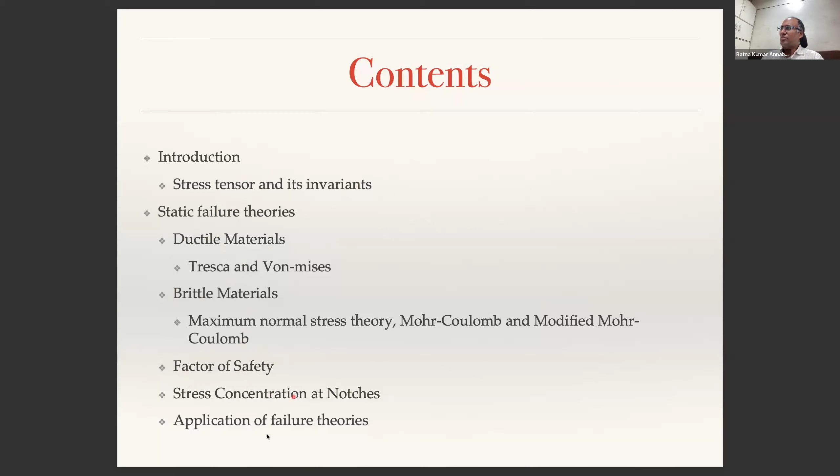In this, we will discuss certain aspects of the concept of a stress tensor and its invariants, and how we will then define the failure theories, different types of failure theories for ductile materials and brittle materials, and then we will define the quantity called factor of safety, and then apply these things to components that have stress concentrations or notches. And then we'll see some application of these failure theories for design problems.

So what is failure? When we say failure, what is the meaning of failure? Does it really mean the complete failure or ultimate fracture of a component, or is it not? And the second thing is, how does one define failure when dealing with a ductile material versus a brittle material? Is the definition of failure the same in both cases? And if you are an engineer, for engineering applications, what do we consider as failure?

The definition of failure itself is important, because depending on the definition of failure, we will be able to characterize or classify whether a particular component or system is safe to use or not. And then, are material properties important? The material properties we have discussed in previous classes, are they important in order to assess failure of a component? These are the questions one needs to ask before we move on to understanding failure.

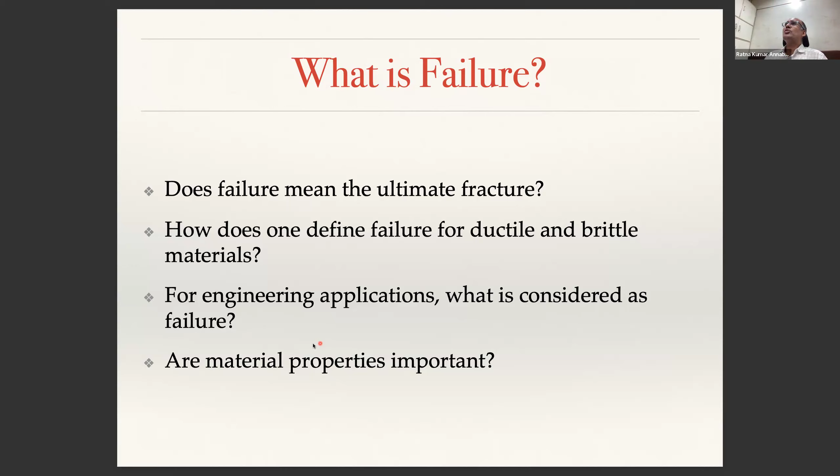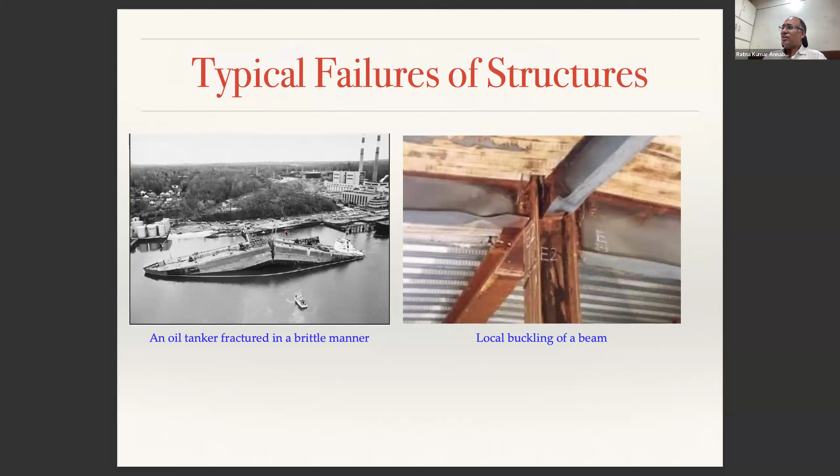So now the question is, why do parts fail like this? Why do structures fail like that? Why did this one only buckle but not fail, whereas this other one completely broke instead of giving a sign like the one on the right-hand side? So the question we ask is, why do parts or components fail? I think this is the single most important question that contributes to a rich scientific understanding of failure of materials. If we don't ask this question, we probably would not understand a large deal about the failure of components.

So from the mechanical engineering point of view, or mechanical design point of view, whenever we are talking about failure, we try to understand the concept of Mohr's circle, and from there we will talk about failure in a little bit more detail. So how many of you are familiar with the concept of Mohr's circle? Just raise your hand.

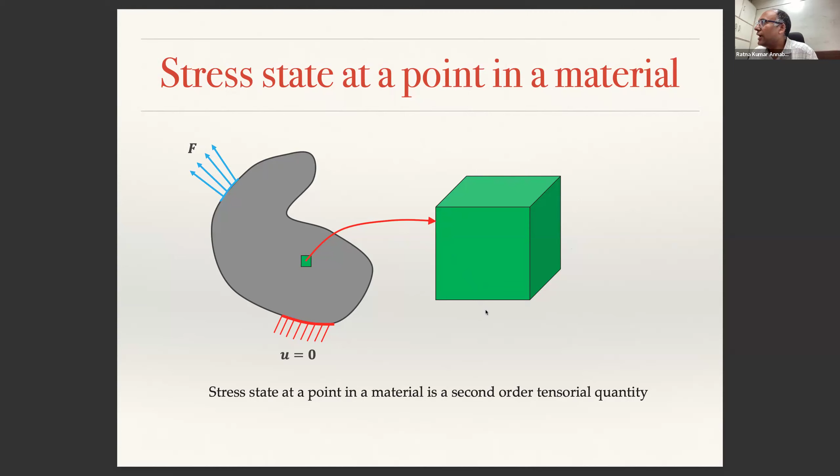If I look at that infinitesimal volume element, I can show my stress state at that point as, for example, this is your x-axis, y-axis, z-axis. To this plane, the normal to that plane is x-axis. Can you see that? Similarly, normal to this plane is y-axis. Normal to that, the front plane is z-axis. Is that clear to all of you? Yes, sir. Yes, sir. Yes, sir.

So now, on this particular surface, you will have sigma xx. The first index represents the normal to that particular surface on which you are representing this, and the second index is the direction in which it is being represented. So this is sigma xx, what we call normal stress, because it is in the direction normal to the plane. In this plane, the plane's index is x, and this is in the direction of y. This is sigma xy, and this is sigma xz. These two components, represented by white color, are in the plane, which is why they are called shear stress components. So you have a normal stress component and two shear stress components.

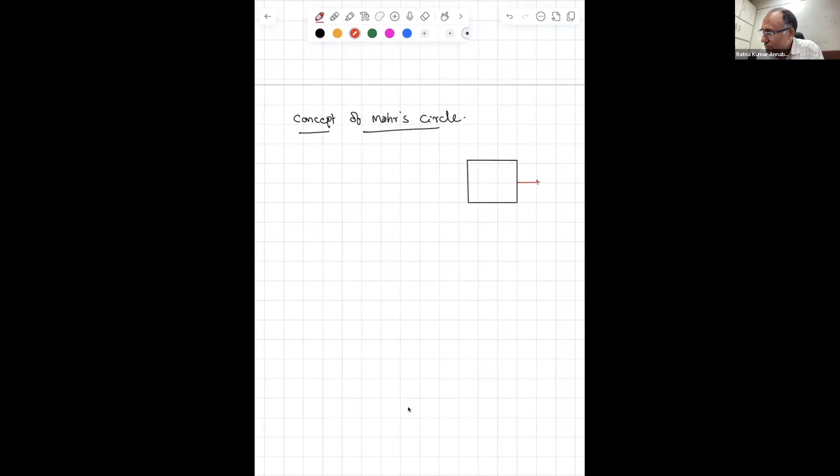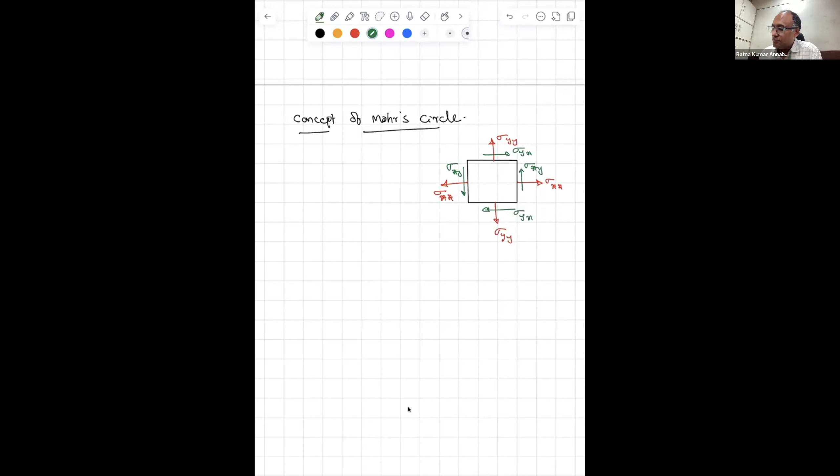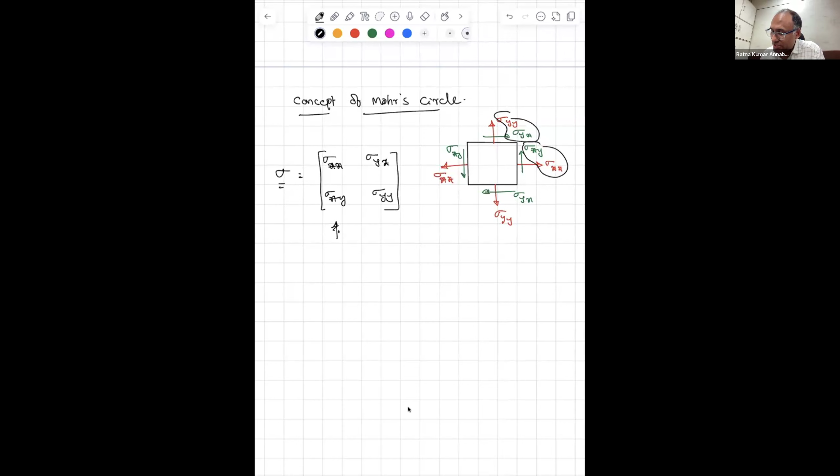So if I take a two-dimensional state of stress, then instead of drawing a cube, I will draw a square. On that, I'll show that is my sigma xx, this will also be sigma xx. That is sigma yy, that is sigma yy. And that is sigma xy and sigma yx, this is also sigma xy and sigma yx. So this is a two-dimensional state of stress, represented by a second order stress tensor: sigma xx, sigma yx, sigma xy, sigma yy. Maybe these two quantities are coming here, these two quantities are coming. This is called a second order tensor.

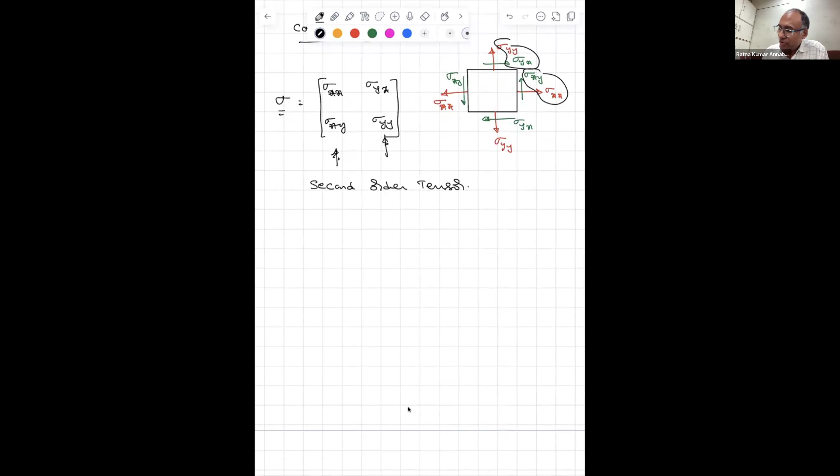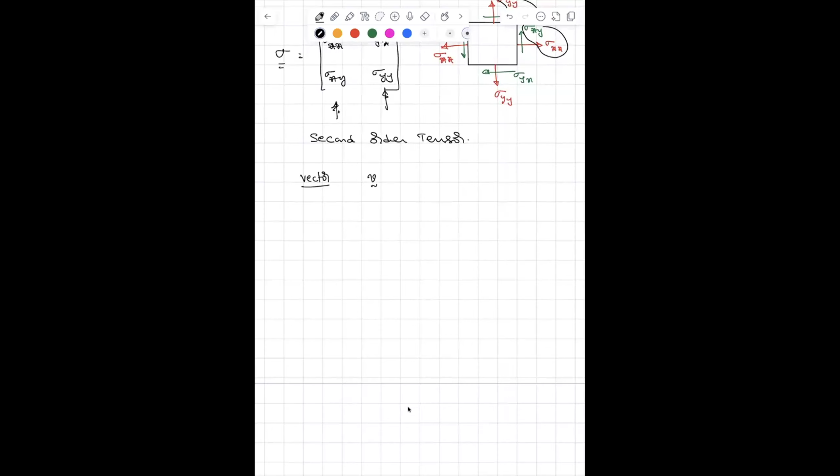What do you mean by second order? Suppose if you take a vector, how do you represent a vector? Magnitude and direction, by direction and magnitude. So let us look at this. Let us say you have x-axis and y-axis. I am drawing a vector v. So how do I represent this vector v? So let us say this is how many units?

And this is 1.5 units, correct? So v can be written as 3, 1.5. Can I do that? Do you agree? So here Vx is equal to 3, Vy is equal to 1.5.

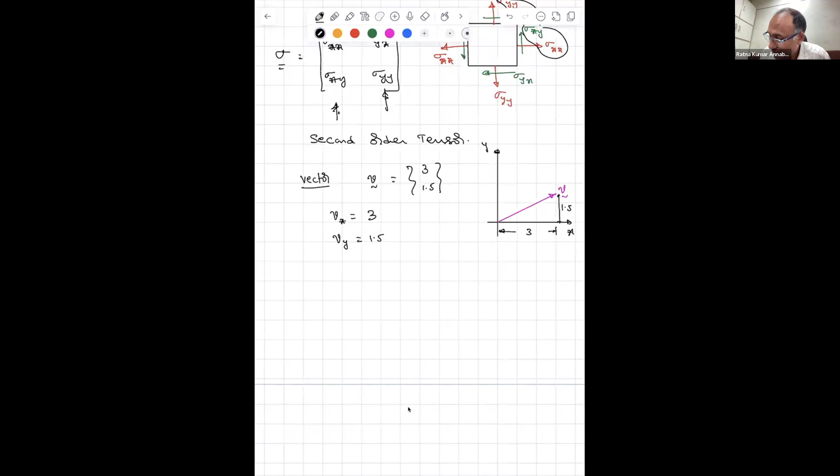That means Vx is the projection of the vector v on the x-axis. Vy is the projection of V on the y-axis. So whenever you are writing a vector, the components of the vector represent the projections of that vector onto the respective coordinate axis. Okay.

So now if you look at this fellow, V is 3, 1.5, the magnitude is what? Square root of 3 square plus 1.5 square. And the direction? Direction, tan inverse, you just represent what is this angle. So theta is equal to tan inverse Vy by Vx. That is equal to tan inverse 1.5 by 3, which is tan inverse 1 by 2.

Right? So that is how you represent the vector. Now there is another way to represent this vector. This vector will have how many components? 2 components here because it's a 2D system. So you say V1 and V2. V1 is your 3, V2 is this other value. So whenever representing this vector, I could write it as V, or I could also write as Vi, where i goes from 1 to 2. Can I say that?

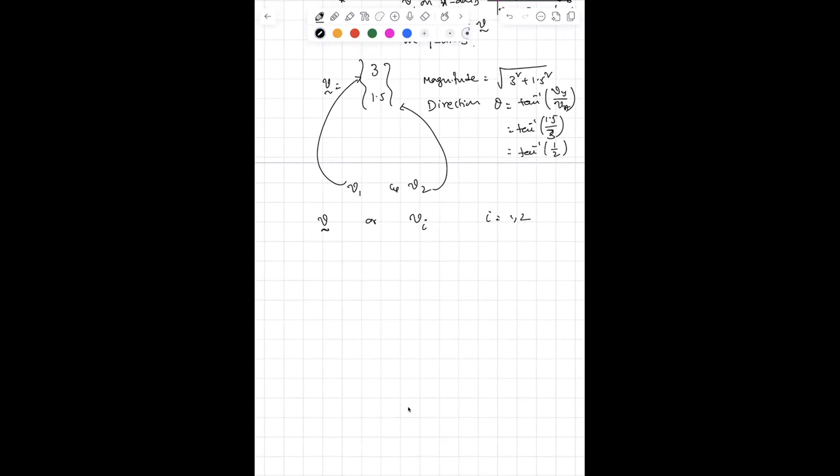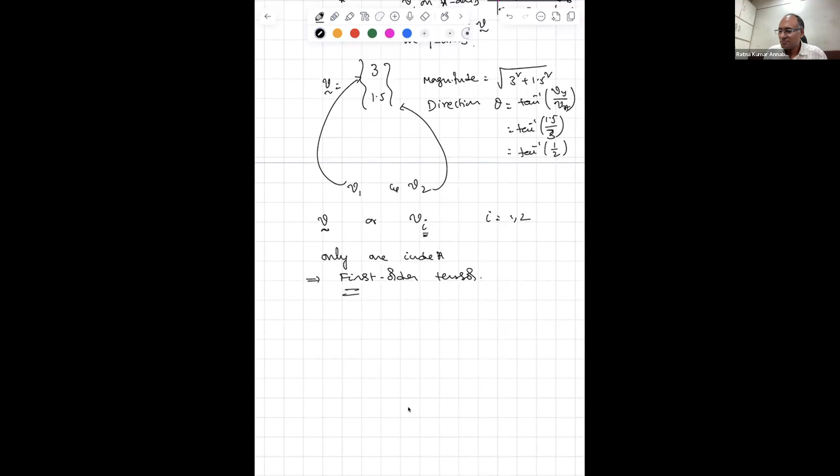Yes, sir. So in order to represent the vector, how many indices am I requiring here? There is need for only one index. That is why it is called a first order tensor, because I need only one index.

Whereas coming to a stress tensor, if I have to represent this, I have to say sigma 11 is sigma xx, sigma 12 is sigma yx, sigma 22 is sigma yy. Correct? Meaning the particular index value: first row first column, first row second column, second row second column, and so on. So in order to represent sigma, I could write sigma, or I could write sigma ij. Since I need 2 indices to access any element, that is called a second order tensor.

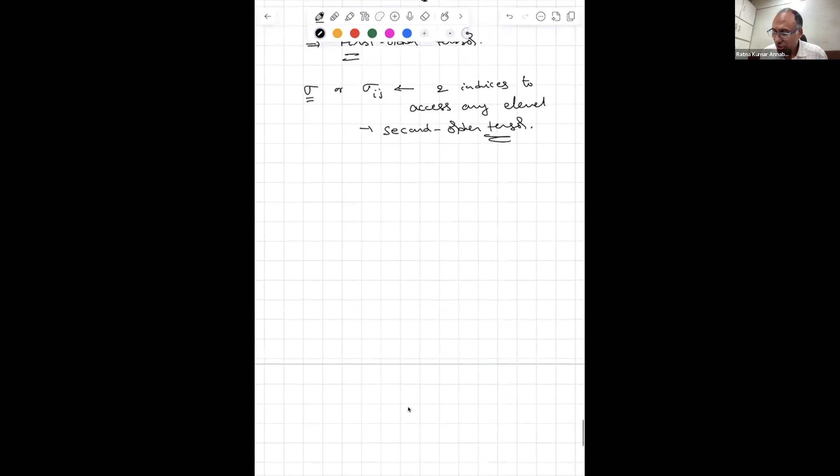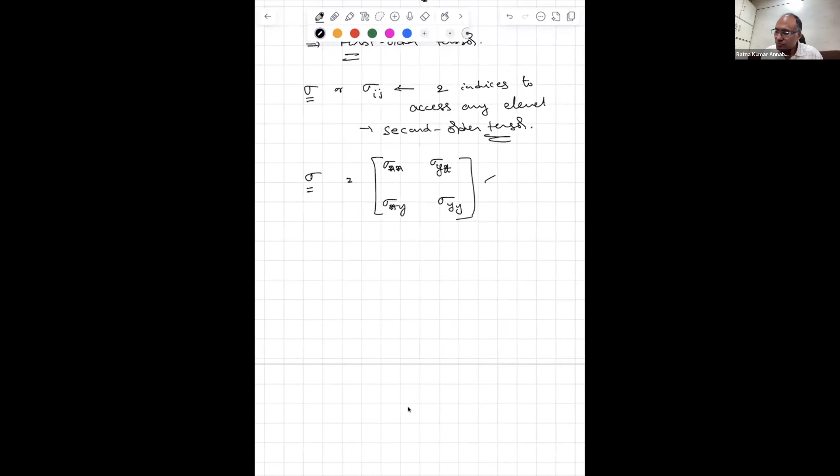Okay. So now you have sigma, which is given by sigma xx, sigma yx, sigma xy, sigma yy. Here sigma xy is written because it is symmetric. Although we have not used that anywhere, this is a symmetric tensor, that is why sigma xy can be written as sigma yx. Now, carefully observe.

For this fellow, whatever we have written here, that is our x-axis and that is our y-axis, isn't it? So if you look at this particular surface, what is the normal to that surface or that edge? What is the normal vector? How do you represent it? X-axis, isn't it? Yes, sir. Is the normal in the direction of the x-axis or not? Yes, sir, x-axis.

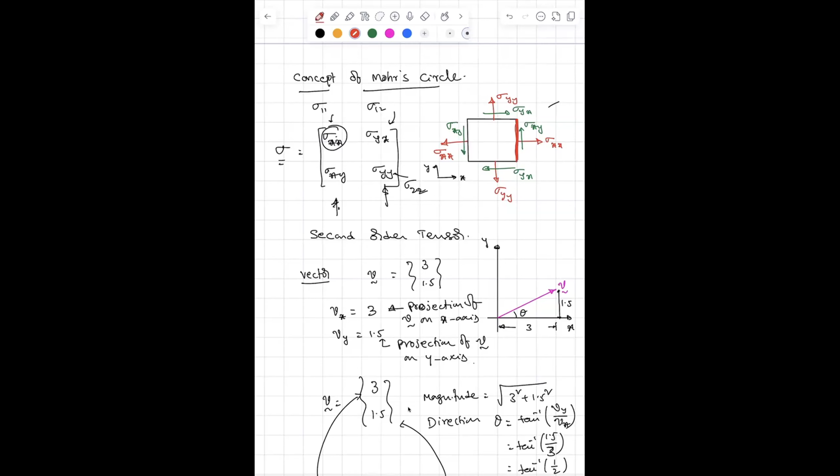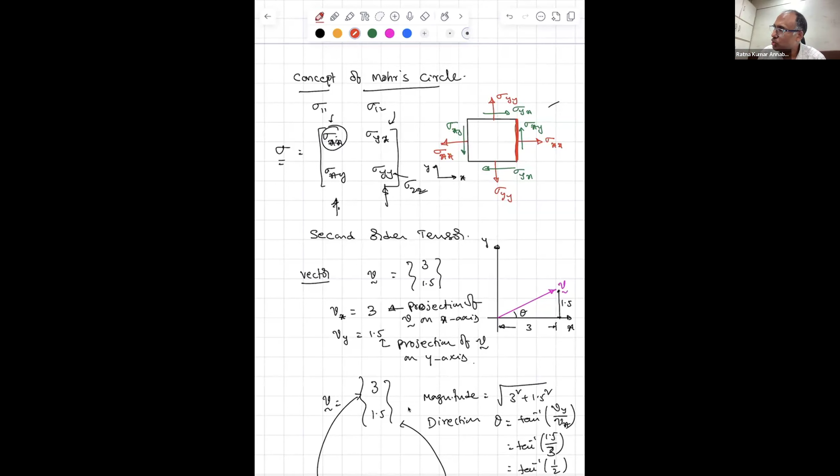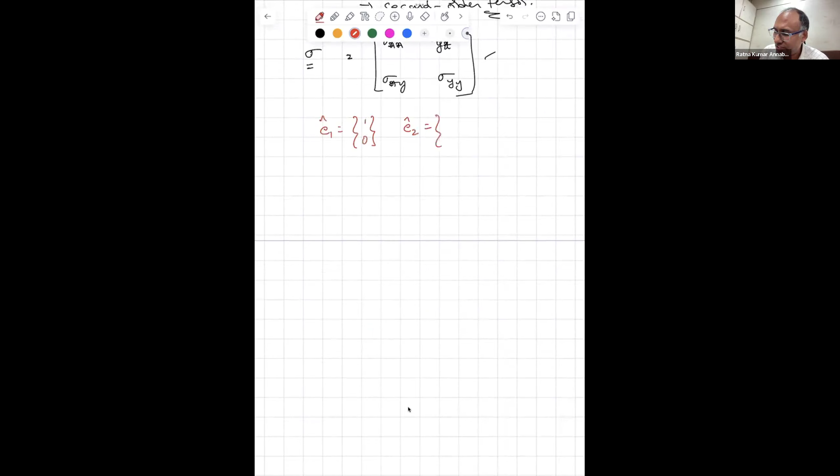So what is the unit vector along x-axis? I. Whenever I say vector, how many indices, how many components will it have? It's a two-dimensional space, so we have to have two components. So let us say the unit vector along x direction is E1 hat, that will be 1, 0. And the unit vector along y direction is E2 hat, that is 0, 1. Do you agree or not?

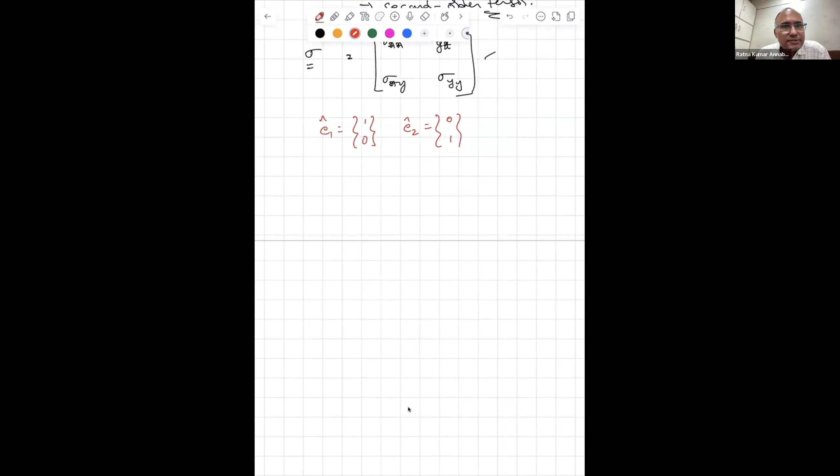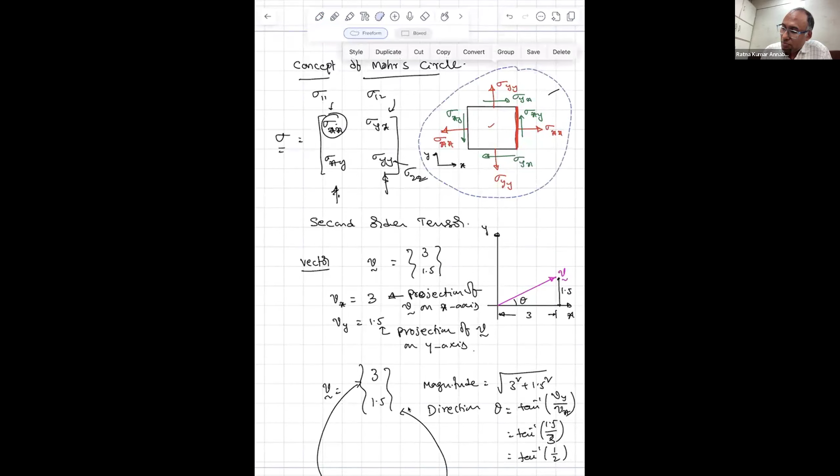Is there any question here? No, sir. Okay. Now, the stress state at this point. Okay, let me. The stress state shown on this infinitesimal element can be represented by sigma is equal to sigma xx, sigma yx, sigma xy, sigma yy.

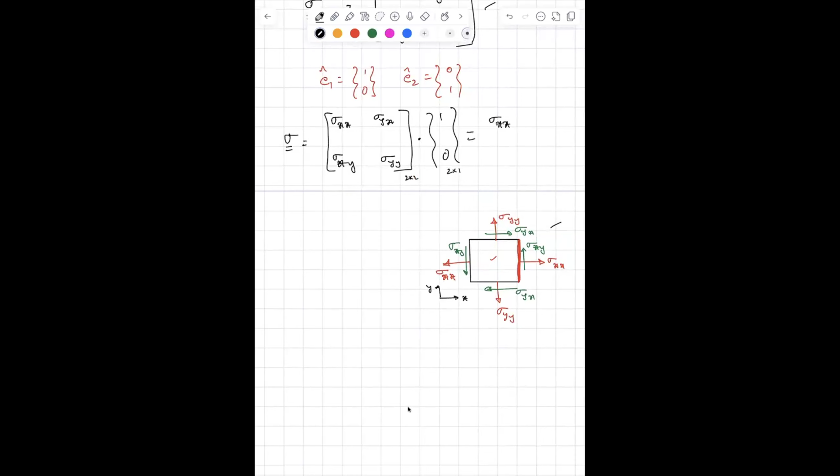And if that is dotted, this is the dot product of that with E1 hat. E1 hat is 1, 0. What will I get? Sigma xx, sigma xy. Is it a 2 by 2 matrix? It is a 2 by 1 matrix. So what do you get? Sigma xx and sigma xy.

What did we get? When I have taken this matrix, this second order tensor, and find the projection of this vector onto a plane whose normal is this, what is that plane? That is this plane, isn't it? Because the plane's normal is 1, 0, then I am getting this, which is basically these two components, isn't it? Yes, sir, this is also a vector, isn't it?

This we call a traction vector. So the traction vector on any plane n is given by the stress tensor dotted with the normal to that plane. That gives the traction vector on that plane. T is equal to sigma dot n will give you the traction vector on that plane. Meaning, if you look at this fellow, on this plane, I am plotting again that particular, I am only drawing that particular plane. Okay.

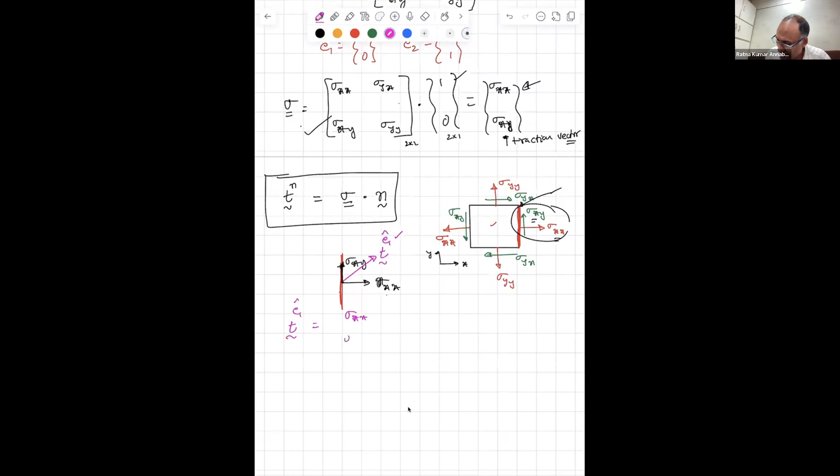E1 hat is the normal to the plane. So when you take the full stress tensor and find the dot product of that with the normal to any particular plane, that gives you the traction vector acting on that particular plane. Is that clear?

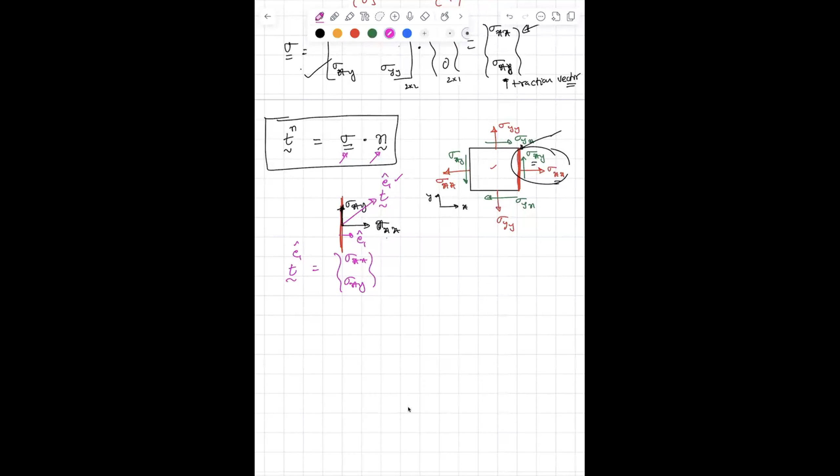Yes, sir. Now, on any plane, you have a state of stress which is a normal stress and a shear component. If it is 2D, you will have one normal component and one shear component, in general. Is that clear?

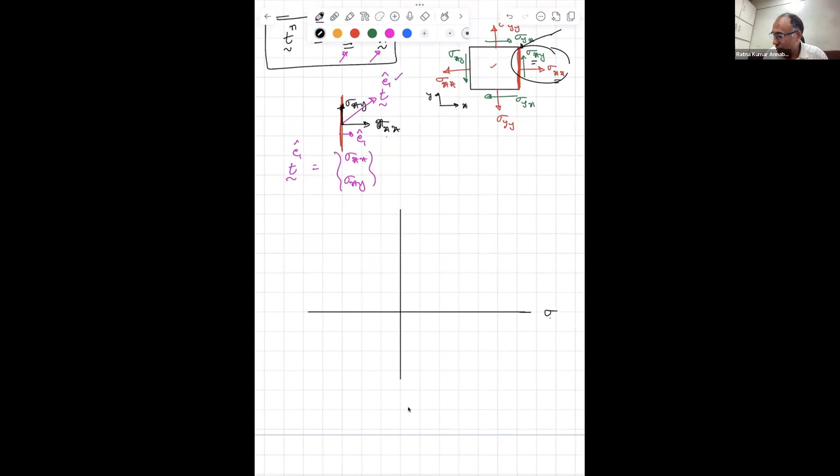Yes, sir. So what the Mohr circle says is the following. You take your x-axis as the normal component of the stress, and the y-axis as the shear component of the stress.

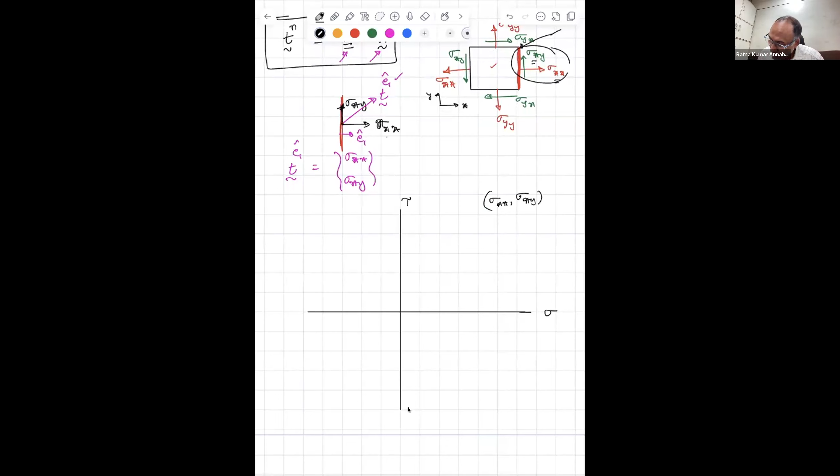Now, on any particular plane, you have sigma xx comma sigma xy. Agreed? Identify that particular point. Let us say that is your sigma xx comma sigma xy.

Now look at the other plane here, highlighted by the pink one, which is at 90 degrees to the original plane. Let us say this is the state of stress at a particular plane. Now we are looking at the state of stress at another plane, which is at 90 degrees. The state of stress is sigma yy and again sigma xy. Both of them are the same.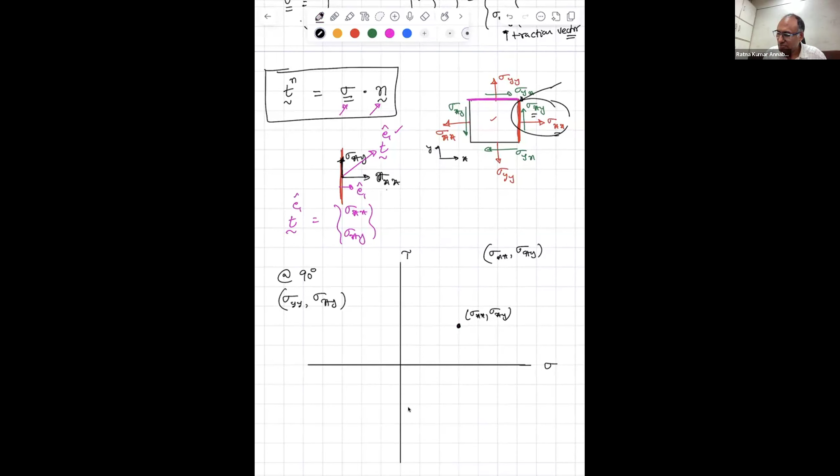So if it is 90 degrees in the physical plane, in the Mohr circle, it will be 2 times theta. That means 2 into 90 is 180 degrees.

So all that I need to do is, let us say this is my sigma xx. Then all that I need to do is draw a line. This is sigma xy, right? And sigma yy will be somewhere, right? That is a normal quantity. So this is sigma xx, and this is sigma xy. And this is the sigma xx value. That is why you got this point.

And your sigma yy could be positive or negative. Let us say sigma yy is this for some reason. Value of sigma yy is this. Then sigma xy should be in the negative direction. Then you join a line. Then this is your sigma yy comma sigma yx.

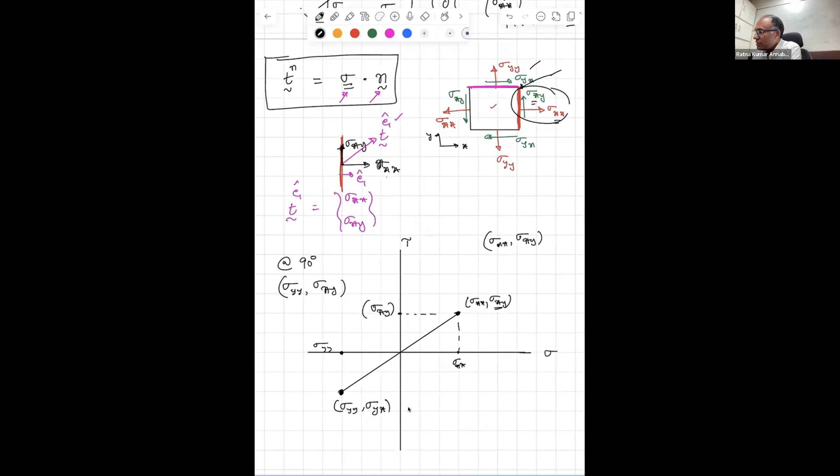You do that, then you have the stress state on one plane and the stress state on a plane which is at 90 degrees to that particular plane. You got that. Then you draw a circle connecting these 2 points. And that is your Mohr circle.

And that Mohr circle will intersect the x-axis, or your sigma, at these 2 points. This is what we call sigma 1 and this is what we call sigma 2. Sigma 1 is the maximum principal stress, this is called the minimum principal stress. And this is where you will have maximum shear, tau max.

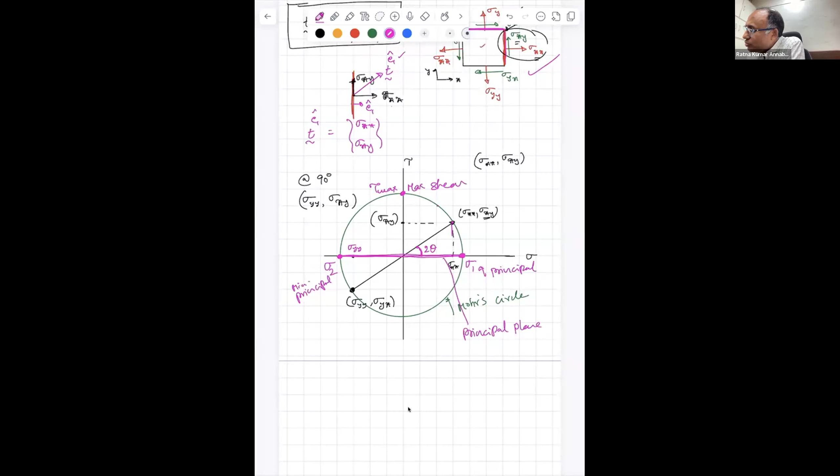Any point on this Mohr circle will represent the state of stress at that point. If the element is oriented like this, you calculate your stress state. But instead, if you change your orientation so that your coordinate axis is like that, then in that plane, the state of stress can be obtained from this Mohr circle by just knowing the angle between these two. If the angle between these two is theta, then from here you choose another point at an angle 2 theta, and that will represent the state of stress at that point.

By drawing the Mohr circle, you can find the state of stress at any point without worrying about calculations. You can see what is my principal plane and what is the maximum shear plane. That means the plane at which shear stress is maximum will always be at an angle of 45 degrees from the plane on which you have principal stresses. Is that point clear?

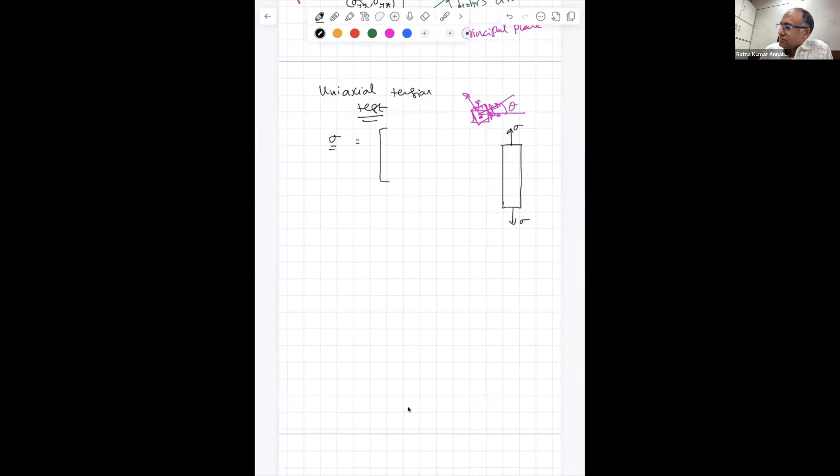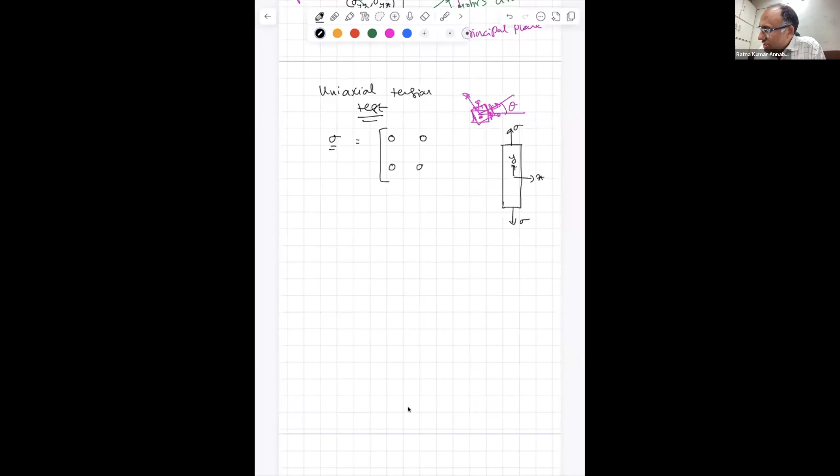Let us say that is my x-axis, that is my y-axis. The stress tensor is 0, 0, 0, sigma. That is the stress tensor, isn't it, because there is no shear stress. Agreed?

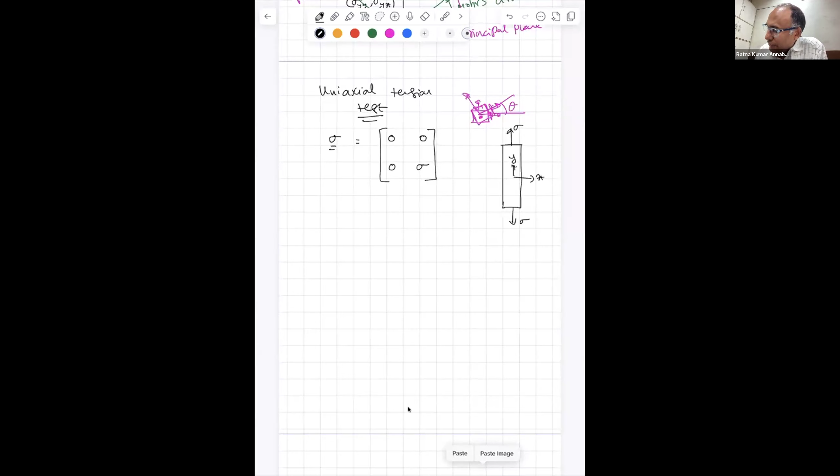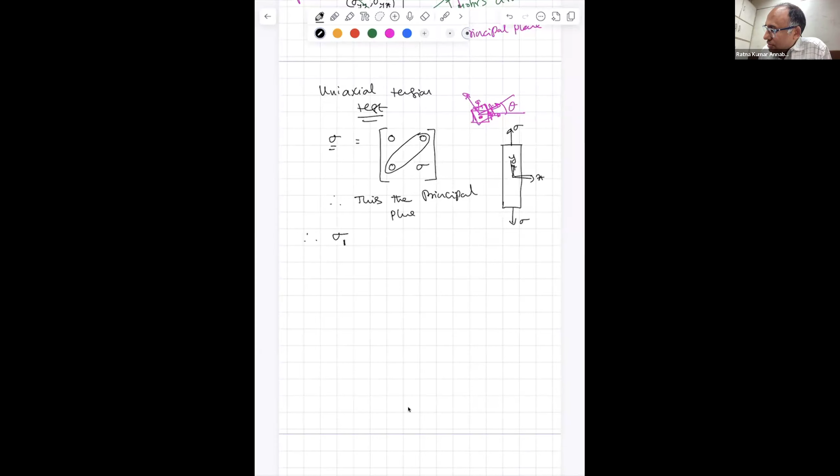Now if you carefully observe, in this particular plane the shear stress is 0. Can you see that? Therefore this is the principal plane, in the paper. Do you agree? That means sigma 1 is equal to sigma, and sigma 2, the minimum principal stress, is 0. Maximum principal stress is sigma, minimum principal stress is 0. All of you agree with that?

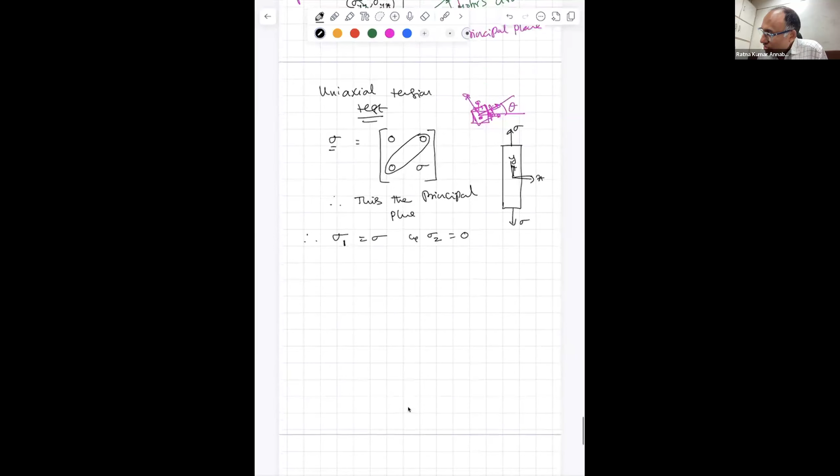Now let us draw the Mohr circle. The Mohr circle can also be drawn if we know the principal stresses directly. You identify the principal stresses and connect a circle between them. That is how you draw the Mohr circle. Let me draw it first.

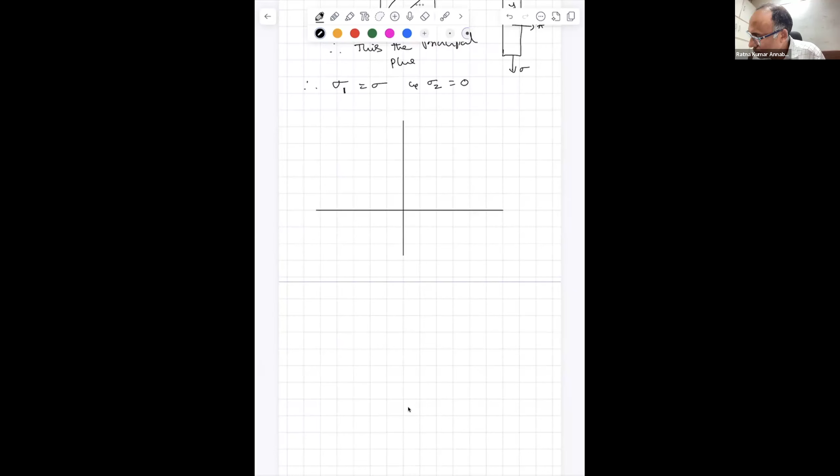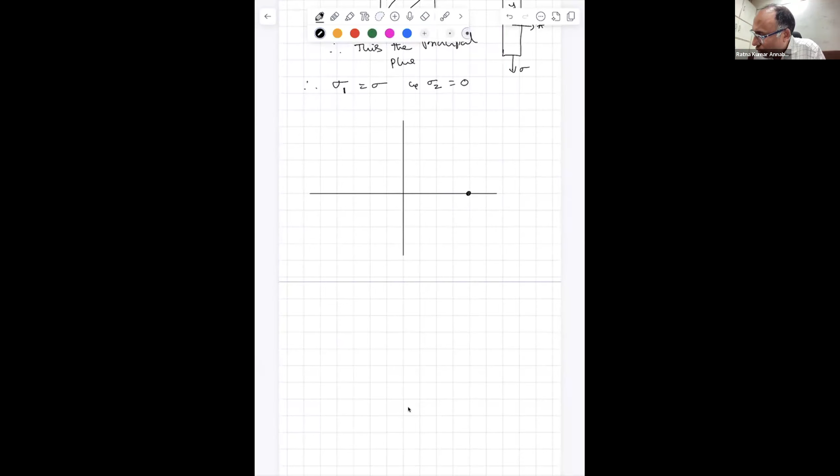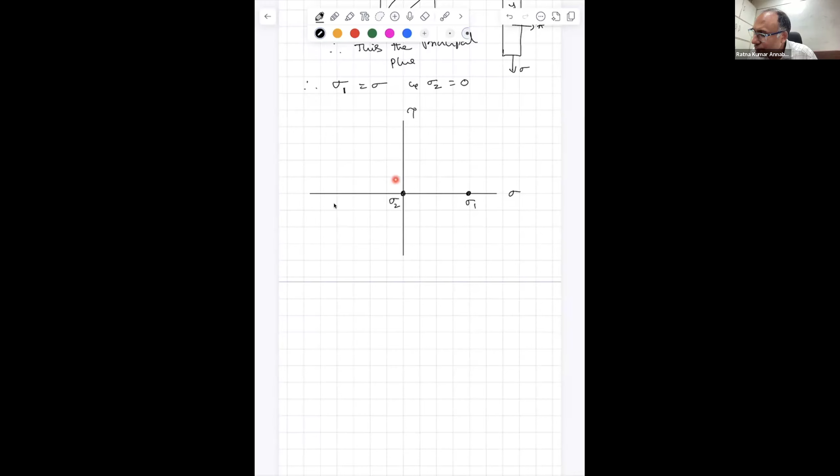What is sigma 1? Sigma 1 is some value sigma. Sigma 2 is 0. This is sigma and that is tau. So this is my sigma 1, and that is my sigma 2. So how do I draw the Mohr circle? I just have to draw a circle connecting these two points on the periphery. That's my Mohr circle, isn't it?

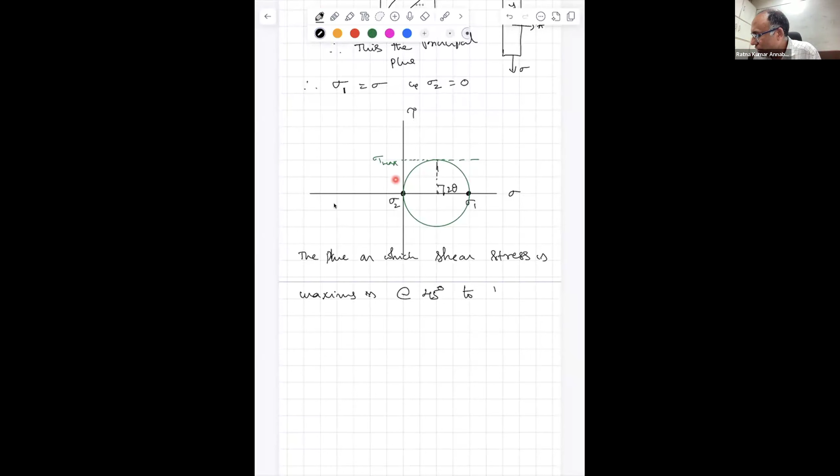So if that is the case, this is my tau max, isn't it, at an angle 2 theta. That means the plane on which shear stress is maximum is at 45 degrees to the principal plane. So this is the plane.

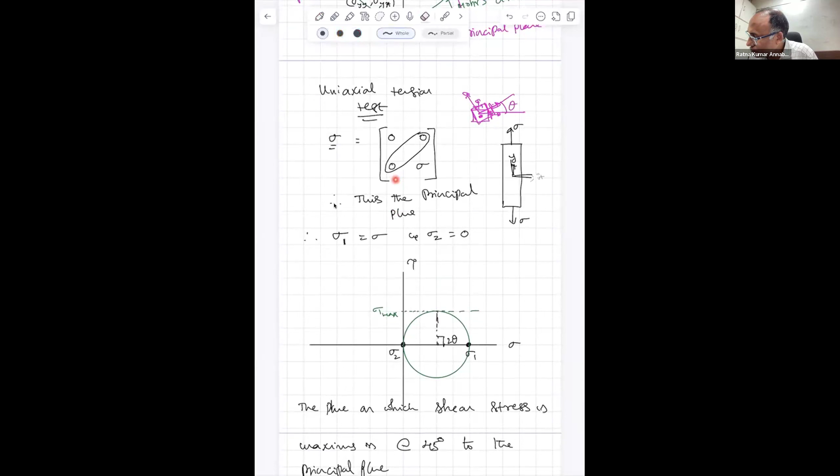So my x and y axis, I am drawing again. That means my principal stress is along the y direction. So the shear stress will be maximum along a 45-degree plane. Along that plane you will have maximum shear stress. That's what it means, isn't it?

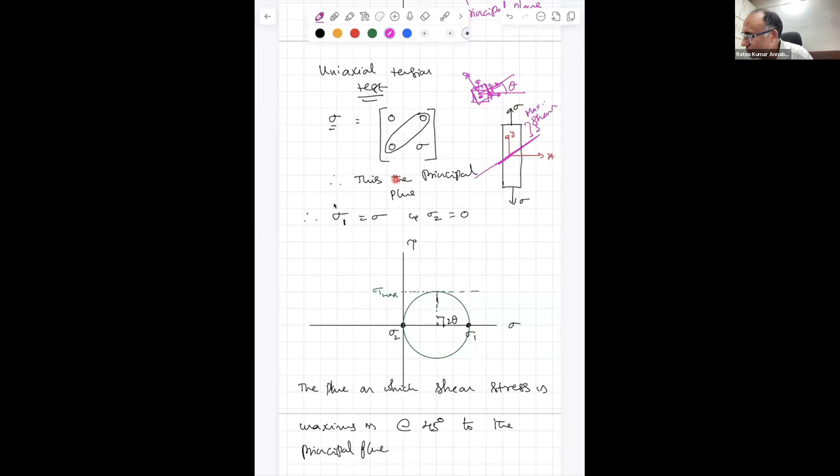That is the reason why whenever you take a ductile material and apply a tension load, there will be failure happening at an angle of 45 degrees. The failure will not happen straight across; it happens at 45 degrees because the shear stress is maximum there. We will see later why shear stress plays such an important role for a ductile material, but the 45 degree serrations you see on the plane are because of that.

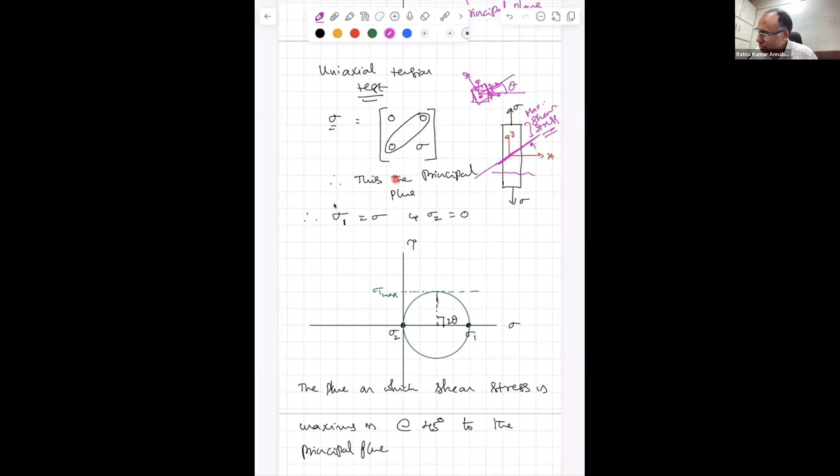So this is the Mohr circle for uniaxial tension. What this basically tells us is that although I'm applying pure uniaxial tension, there are planes oriented at an angle to the principal stress plane which will have some shear developed on them. Macroscopically I'm only applying tension, but there are other planes experiencing shear. That is what the Mohr circle is explaining to us very neatly.

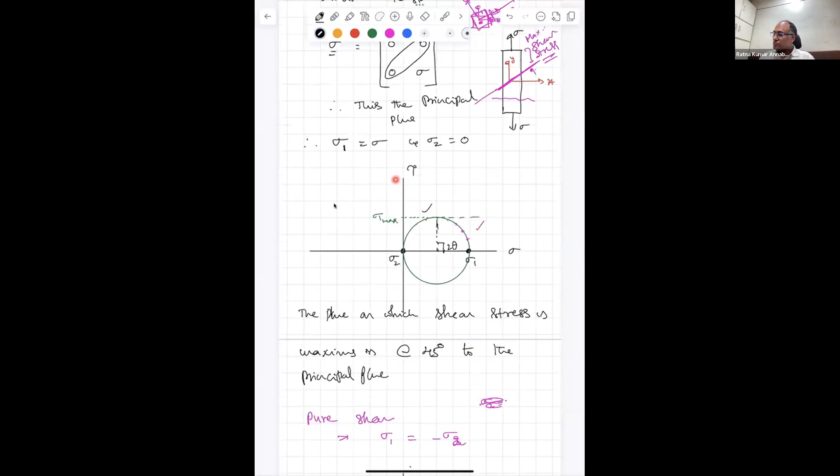Suppose if you look at this fellow, is there any point in this fellow where you have pure shear scenario? What do you mean by pure shear? At that particular point, your normal stress has to be 0 and only shear stress should exist. There is no such point. So that means when you are applying uniaxial tension, you will have simple shear, but you will never have pure shear. Okay?

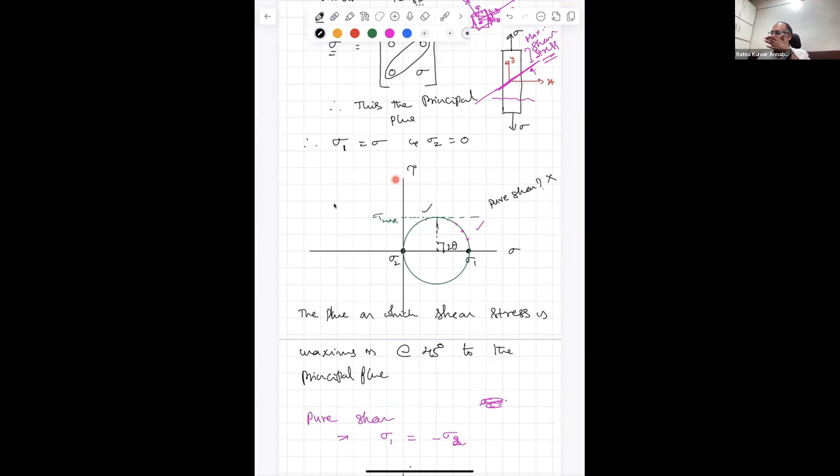By looking at Mohr circle, you can make certain observations about the behavior of the stress state. Any questions?

Sir, if we take into account Poisson's ratio, then you will also have a component in the other direction also, right? No, we are only talking about the two-dimensional state of stress. Whenever you have a 3D state of stress, then that comes into picture, but that we are not looking at right now. That we will talk about later.

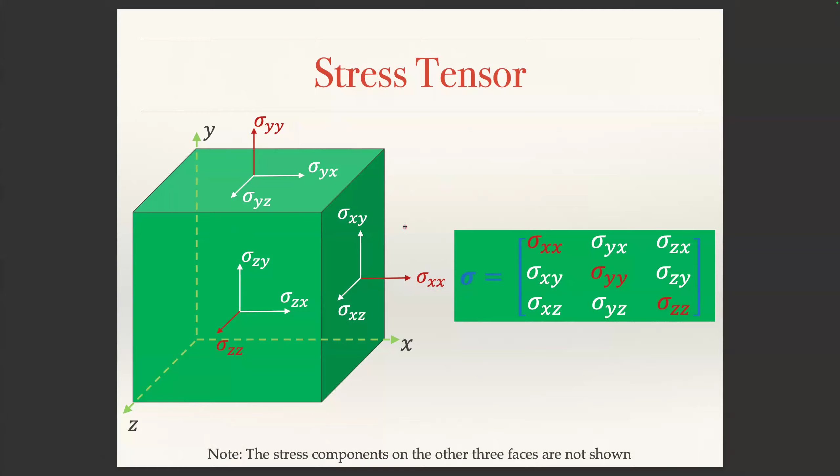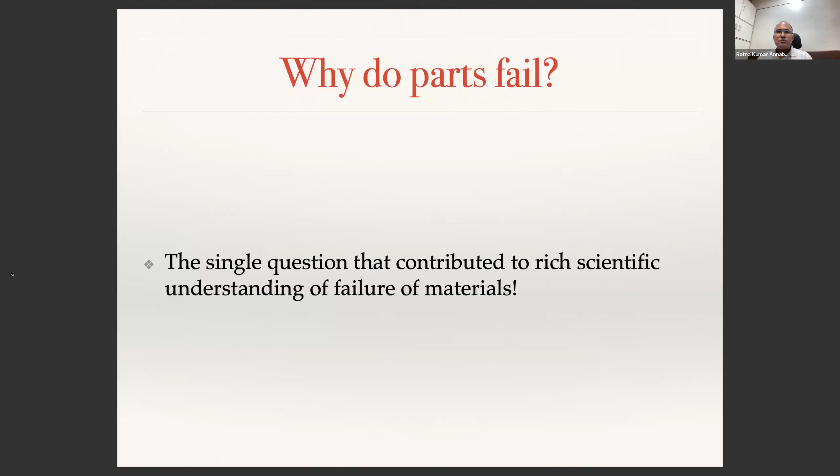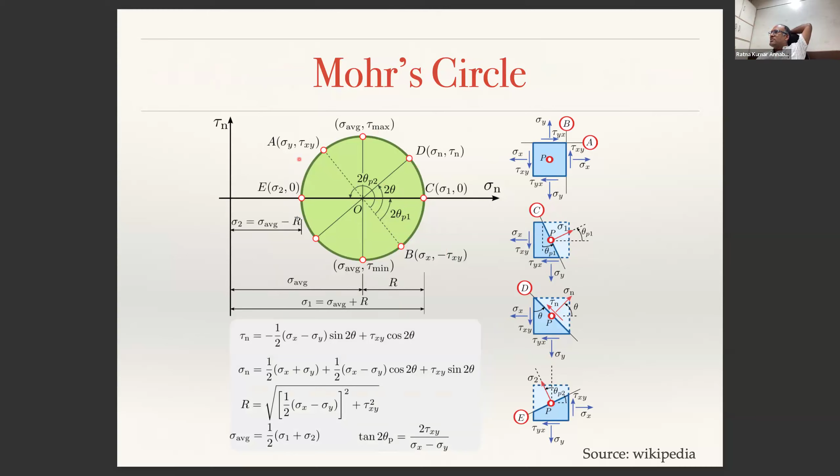Okay, now how do you draw Mohr circle for 3D? Whenever you are dealing with a three-dimensional state of stress, you will have three principal stresses instead of two. That is sigma 1, sigma 2, and sigma 3. When you had only two principal stresses, what did you do? This is sigma 1 and that is sigma 2, and you just drew a circle between sigma 1 and sigma 2. That is one Mohr circle.

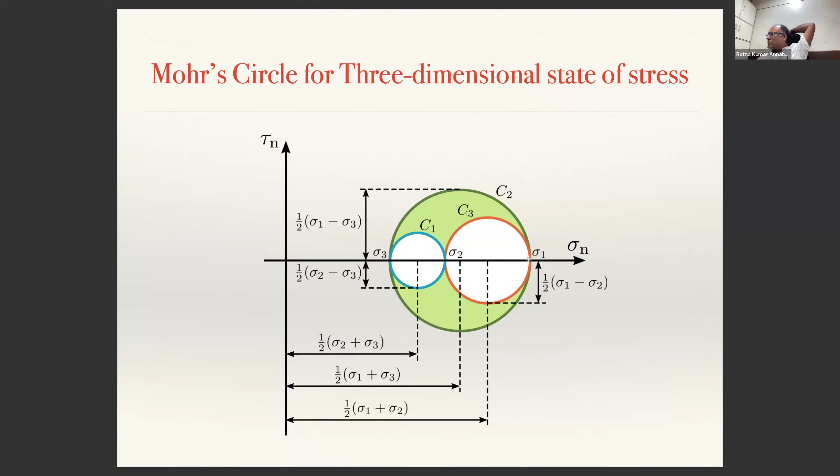And here you can see the maximum shear stress will be sigma 1 minus sigma 3 by 2, where sigma 1 is the maximum principal stress and sigma 3 is the minimum principal stress.

Okay, now if you are doing a static tensile test, in general the ductile materials are limited by their shear strength. Why? Whenever we are talking about failure, for a ductile material, the failure is defined by the onset of plastic deformation, because once the plastic deformation begins, then your component is considered to be not delivering what it is functionally supposed to deliver, since there should not be any plastic deformation in the material. So when the plastic deformation onsets, that is when you consider a ductile material has failed.

How does plastic deformation begin? What is the mechanism for plastic deformation in a ductile material? Shear. Dislocation motion, right? Dislocation motion is what represents plastic deformation for a crystalline material. How does dislocation motion take place? Dislocations move under shear, so that is why they are limited by their shear strength. Whereas in brittle materials, there is no dislocation motion, and hence the failure is represented by complete fracture. Fracture means normal strength - the atoms should be separated from one another. That is why brittle materials are limited by their normal strength.

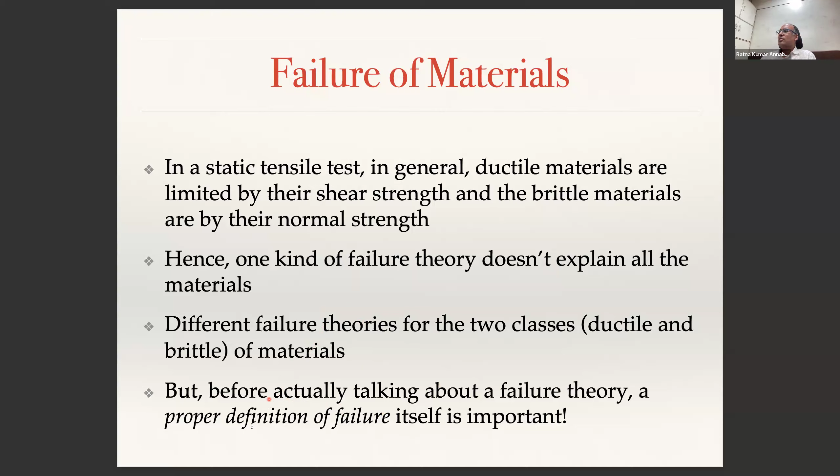So we know that the mechanisms are different, and hence you have to develop different failure theories. That is fine. But before we actually talk about a specific failure theory, we need to develop a proper definition of failure, as we were discussing.

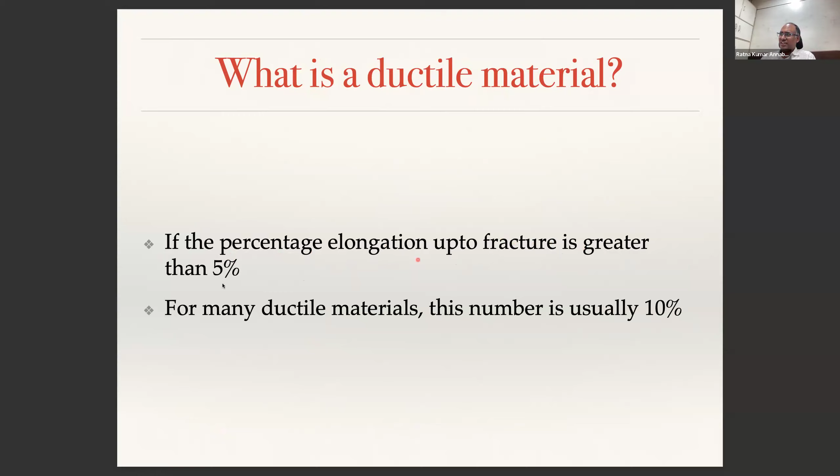A ductile material is defined as one where the percentage elongation up to fracture is greater than 5%, and in some materials it is up to 10%. That is how you define a ductile material.

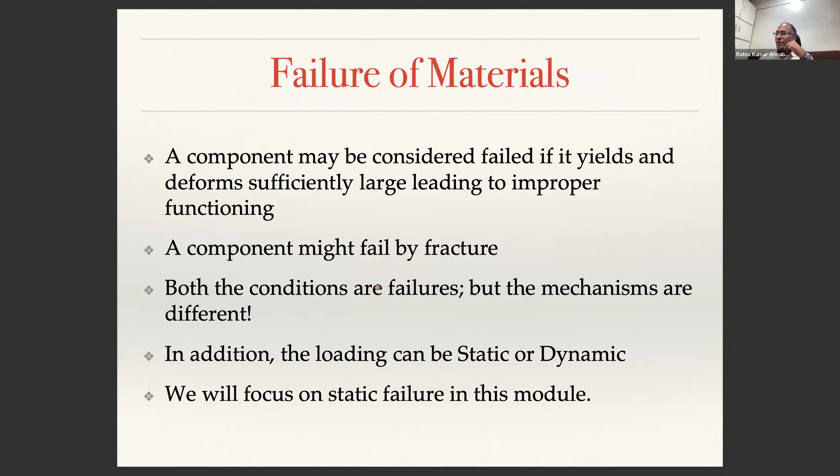As we have discussed, we will first focus on ductile materials and we will only focus on static failure in this module. Ductile materials fail by fracture if loaded beyond the ultimate tensile strength. But most machine components made of ductile materials are considered to have failed if they cross the yielding or plastic deformation point. So the yield strength of a ductile material is much less than the ultimate tensile strength of the material.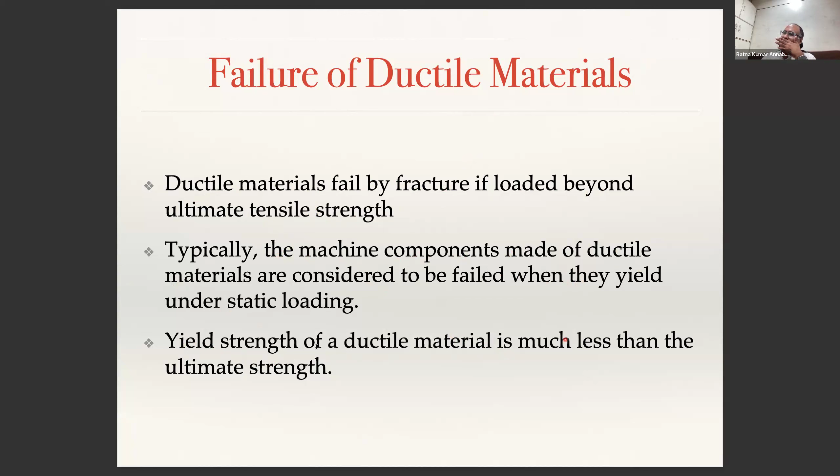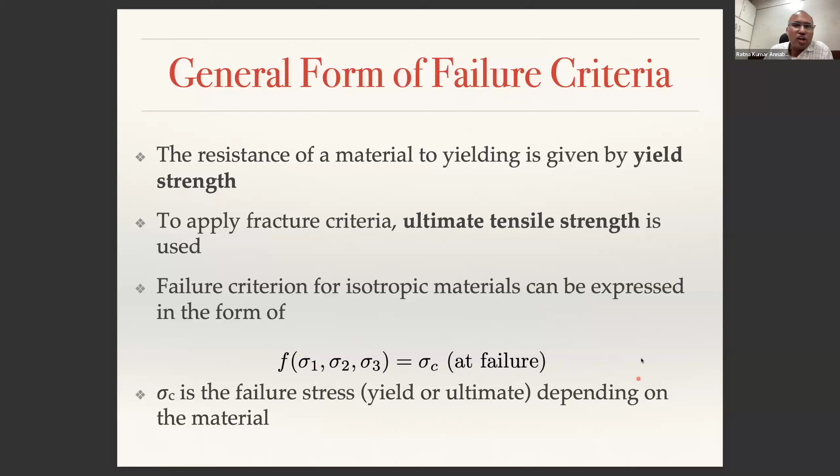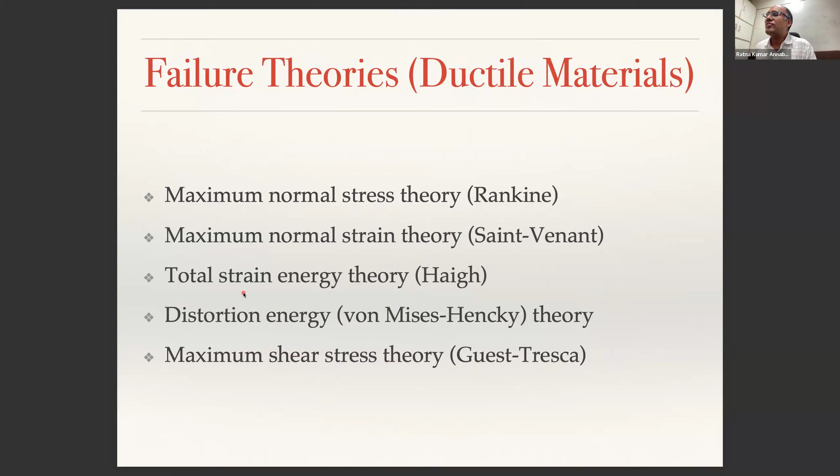Maximum normal stress theory, normal strain theory, total strain energy theory, distortion energy theory, maximum shear stress theory — these are the failure theories we will talk about in this course. I think I'll stop here, and we'll meet next week to talk about the invariants of the stress tensor, which is important to drive the point of why we write failure theories in principal stress space. Any questions?

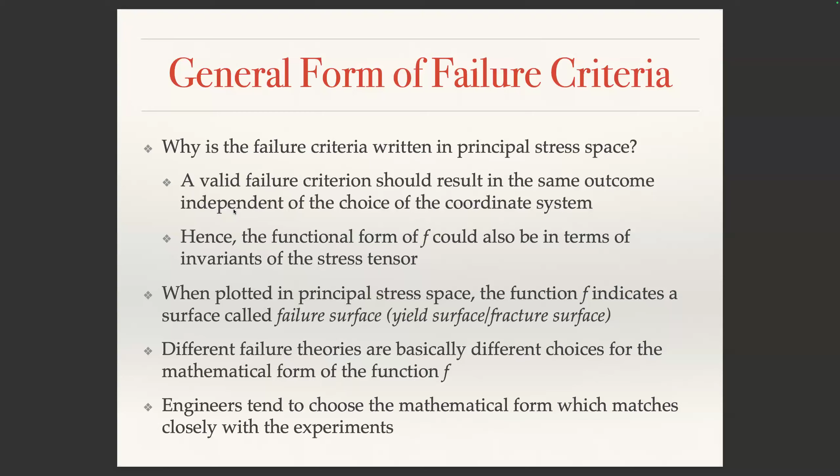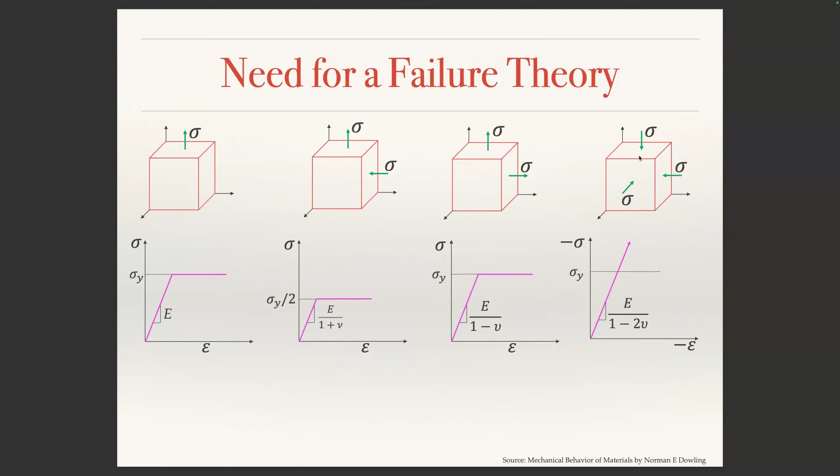In the couple of slides back, you showed a picture — the last one with all three compression loads. Why is the stress and strain in the negative direction? Yeah, because there is compression — I showed compression instead of tension, that's all, all compression. So strain and stress both are negative. Okay, thank you Professor.